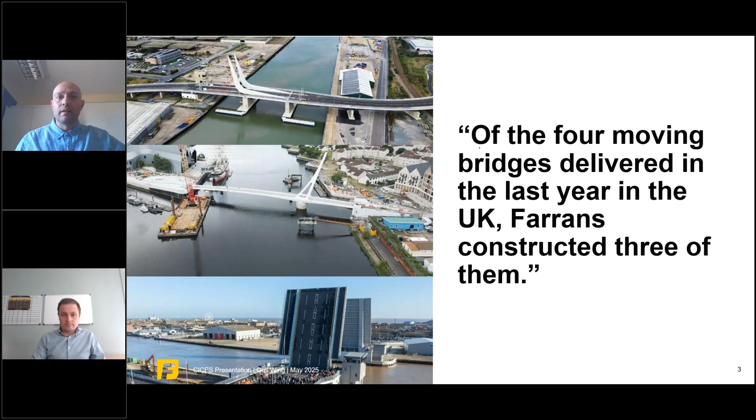The agenda for this presentation will cover the following: an introduction to the scheme, including high-level information about the purpose, benefits and major elements. We will discuss key construction activities, highlighting significant elements and the wide range of construction techniques employed in their delivery, and the challenges — this was a technically demanding project which presented many challenges to our team.

Today we'll focus on the NAV1 install, the marine cofferdam construction including Pier 4 specifically, and the bascule bridge span installation. To wrap up there will be a question and answer session, so if you have any questions you'd like us to answer, please type them into the chat box and we'll try and answer as many as we can at the end.

So let's get straight into the main subject of this presentation, the construction and associated challenges faced in the delivery of this landmark project.

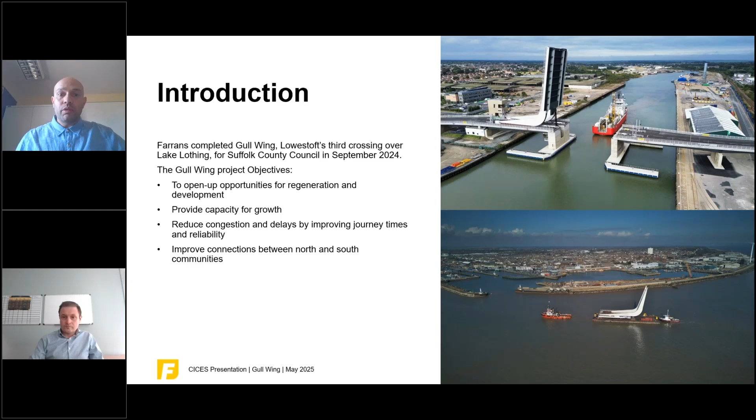The Gull Wing Bridge opened to the public on the 7th of September 2024 and is the third crossing of Lake Lothing. Its main objectives are to encourage opportunities for regeneration and development, to provide additional capacity to support growth, reduce congestion in the town, reduce journey times and improve reliability of those journey times. This will improve the connection between the communities north and south of Lake Lothing. This is a project that the locals have been campaigning for over a generation, and it has finally been delivered and welcomed by the local residents.

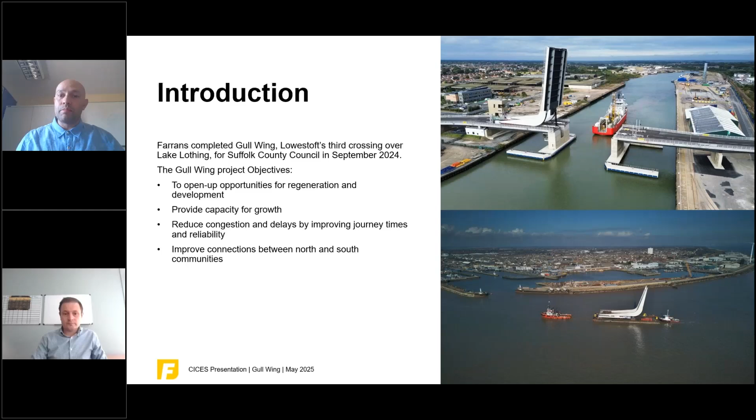The Gull Wing Bridge is located in Lowestoft, a coastal town in Suffolk and the most easterly point of the UK. The new bridge provides an additional crossing of Lake Lothing, which forms the inner harbour of the port of Lowestoft, connecting the Waveney River and the Broads National Park to the North Sea, effectively cutting the town in half.

Until now, there's only been two crossing points: the A47 bascule bridge on the east, located at the Sea Harbour, and the Mutford Lift Bridge on the west at the mouth of Oulton Broad. To the west of the town are the rail connections in red, which also affect traffic flows as there are two level crossings on the main traffic routes.

So as you can imagine, with marine traffic from the operational port and recreational vessels entering and exiting the Broads National Park, the regular rail services interfering with traffic routes, the journey time for local traffic are frequently impacted. This new crossing provides more reliable journey times as it bridges the rail line and provides 12 metres of clearance at high tide, which is nearly 4 times that provided by the A47 bascule, thus significantly decreasing the number of bridge openings required per day, maximising the availability of the route to road traffic.

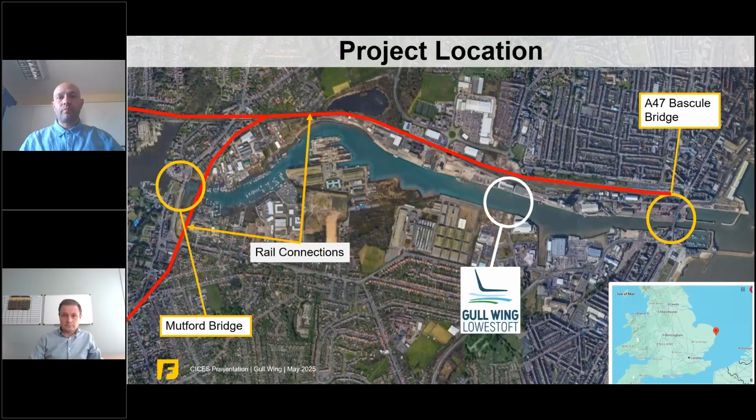The project is for the construction of an 8-span viaduct, including the rolling bascule, with roundabouts to the north and south. It provides a single carriageway road with cycle and pedestrian facilities on both sides of the carriageway.

This leads to the south approach embankment, a reinforced earth embankment connected to the south abutment. Then we have the south approach viaduct, or SAV as we call it. The SAV has 4 spans supported on the south abutment and 4 piers, the last of which, Pier 4, is located within Lake Lothing. The final span onto Pier 4 is responsible for taking the majority of the load of the bascule bridge, which rolls back onto this span when opening.

The control tower is located adjacent to the south approach viaduct. This is a 7-storey building with adjacent plant rooms situated beneath the bridge deck. Between them, we house the bridge operator, the hydraulic pumps and all the equipment required to operate the bridge, as well as a backup generator.

The bascule span, supported between Piers 4 and 5, located within Lake Lothing, is a 39.5 metre span. It is a single leaf rolling bascule and the largest of its type, powered by hydraulic cylinders.

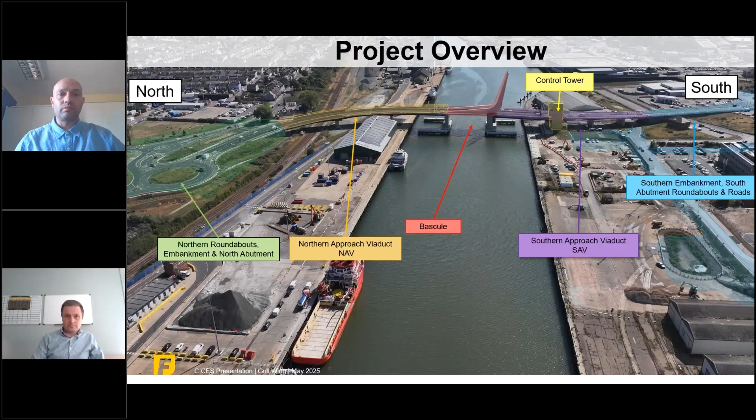To give an idea of the scale of the project, here are some of the high-level figures. There's more than 2,250 tonnes of structural steelwork fabricated and installed between the approach viaduct and bascule spans, of which the bascule span contains circa 650 tonnes, and that doesn't include the 400 tonnes of counterweight concrete. The bascule raises in 116 seconds and lowers in 106 seconds.

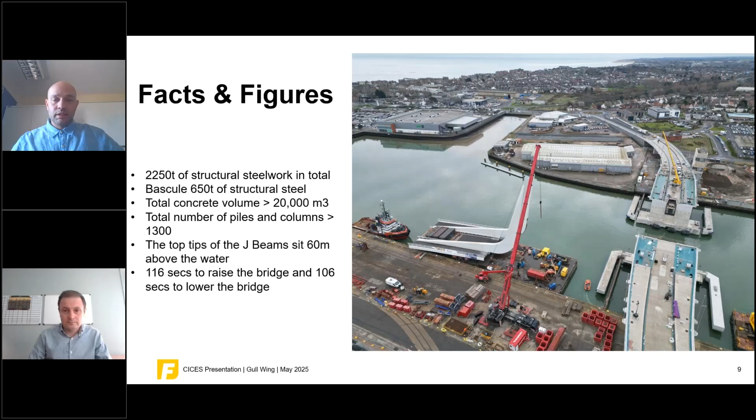Thanks, Tristram. I'm going to give you an overview of some of the key construction activities we undertook to construct the bridge.

The first is piling and ground improvement. Piling was amongst one of the first operations to commence, with several different types of piles and methods required.

On the left photo, you can see the auger push piles for the eastern protection dolphins to the piers. These were steel piles which were screwed into the lake bed using an auger push technique due to the proximity of a UK Power Networks tunnel, which required us to minimise vibration. To install the piles, we required a static platform in the form of a jack-up barge, which you can also see in the image, the piling rig sitting on it.

Hydraulic drop and vibration hammers were used to install the other steel tubes and sheet piles for the marine pier cofferdams on the western dolphins, with a total of 184 piles in total. The image in the centre shows the installation of the cofferdam for Pier 4.

Rotary bored piles were also required for the marine pier foundations. These piles were installed through the steel combi tubes, and are up to 65 metres in length.

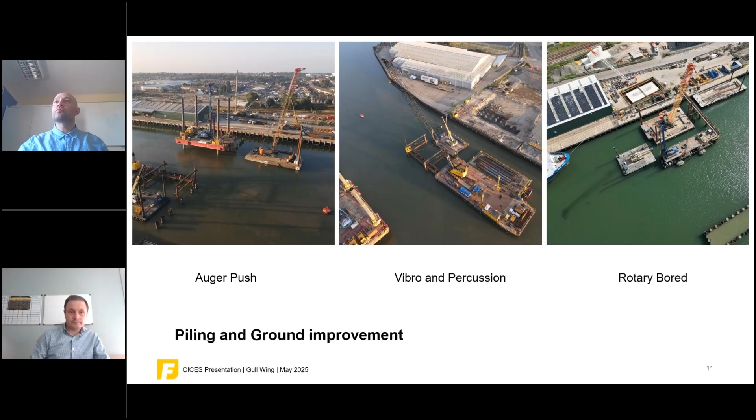Landside, we required approximately 170 number continuous flight auger piles for the land-based piers and structures. These were 1,200mm diameter and ranged between 25 and 30 metres in depth. The image to the left shows installation of piles to the control tower and the plant room. The central image shows the piles installed for Pier 6 being cropped down to size, and you can get a real sense of the scale here with the mini-digger in the foreground.

And then the right-hand photo shows the deep soil mixing. There were some 1,200 deep soil mix columns which were installed below the northern approach embankment as a ground improvement technique, and these were then topped with a mass mixed load transfer platform. A deep soil mix column adjacent to the north abutment can be seen in this photo being installed.

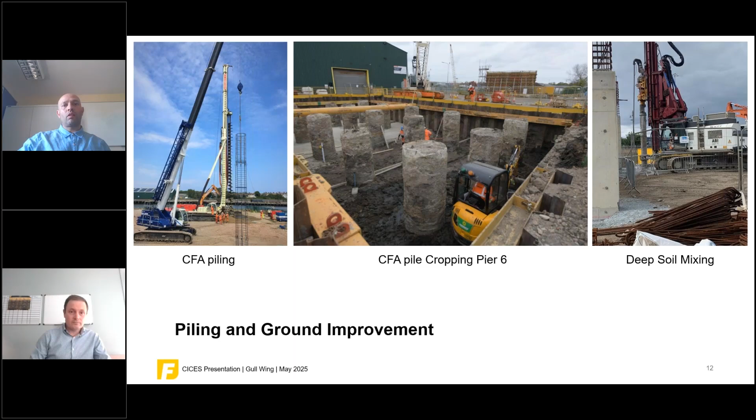There were numerous and significant concrete structures required across the project, some of which can be seen in the photos on screen. The image on the left shows Pier 3, the plant room immediately behind it, and the control tower to the right-hand side. Pier 2, Pier 1 on the south abutment, and the south approach in the background behind.

The image in the centre shows Pier 4 completed with the south approach steelwork in position and the placement of the permanent formwork ongoing. And the image on the right shows Pier 5 in the foreground supporting span nav 3. You can then see nav 2, and finally you can see span nav 1, which crosses the railway with its deck and its parapets already completed.

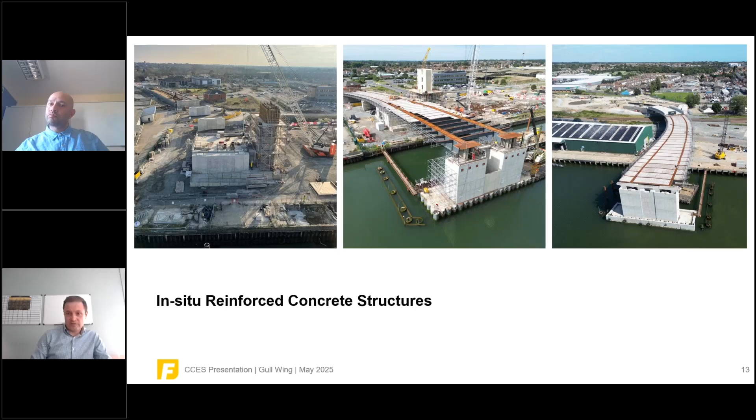That we will come to in a moment. And beyond that, you can see the northern approach embankment.

Temporary works were critical and a very significant element of the construction works that we carried out. All of the viaduct sections and the bascule span were manufactured off-site in Belgium by our supply chain partner, Victor Buyck Steel Construction. The viaduct sections were delivered in 3 stages.

Span nav 1 was delivered first, which was installed over the railway during a planned possession. Spans nav 2 and 3 were next to be installed, closely followed by the 4 southern approach viaduct spans. These were all transported to site by barge, installed by crane.

Various sizes of cranes were used, the largest being the CC 8800, which has a 1,750 tonne capacity, and was used to install the southern approach spans. This crane is one of the top 10 largest crawler cranes in the world.

The bascule was then delivered last, and this was installed directly from a barge without the use of craneage, and further detail will be provided later on.

The image here on the left shows span SAV 3 being installed with the CC 8800. The image in the centre shows one of the two cylinders being installed into the cylinder pit, safe at Pier 4. The cylinders are substantial items, weighing approximately 60 tons each, and they have to be lifted, orientated correctly, and secured within the cylinder pit prior to arrival of the bascule.

And the image on the right shows the bascule span itself being moved into position by barge. It's worth noting that we had a 3-week channel closure to get the bascule into place and operational, as the channel had to be reopened to port traffic by the end of that 3-week period.

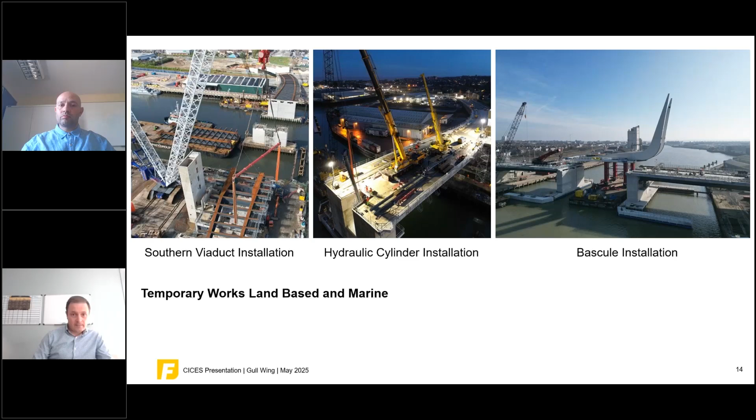Thanks, Ross. As Ross talks through these quickly, it sounds straightforward. It wasn't. Each of these elements presented their own challenges.

There were physical constraints, both on and off site, that had to be dealt with. Each demanded detailed coordination with numerous suppliers and stakeholders located across the UK, Europe and beyond. Constant review was required across the site of progress, phasing and interfaces to ensure coordination of site activities, logistics for moving the sizable elements of the bridge across from Europe, and preparation of the temporary works required for the heavy lift plant needed for installation. Next, I'll talk through a number of these challenges, how they were managed and overcome.

The Gull Wing Bridge project had many interesting and varied challenges throughout. Today I'm going to focus on two of the most challenging parts of the project. The first is the North Approach Viaduct Span 1, or NAV1 as it was more commonly referred to. NAV1 is a curved viaduct span constructed on CFA piled reinforced concrete foundations, the north abutment and Pier 7.

The deck is designed as a composite structure made up of a structural steel ladder consisting of two longitudinal main girders with transverse cross girders, combined with a reinforced concrete deck. Some key statistics: the span is founded on 31, 1.2 metre diameter continuous flight auger piles, 25 to 30 metres deep. 2,100 cube of concrete was poured in the foundations between the piles, pier and abutment. There's a 55 metre span between the north abutment and Pier 7. There were 290 tonnes of structural steel used in the span, and 460 cube of reinforced concrete was used between the deck and the parapets.

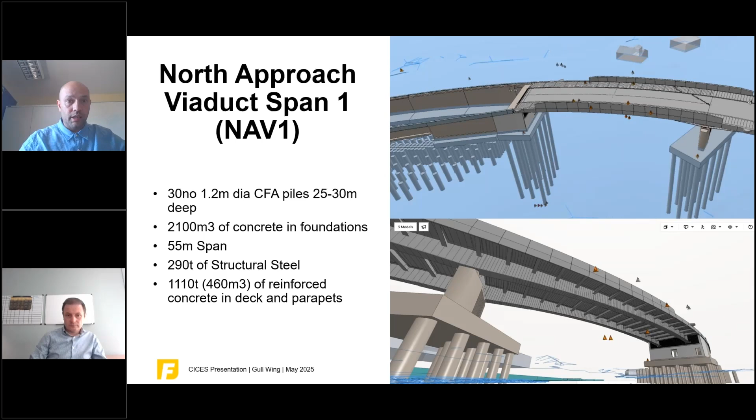The key constraints in this area were the East Suffolk Railway, which included up and down lines plus working sidings. As part of the client's agreement with Network Rail, a single 52-hour weekend possession of the railway had been agreed to allow for the installation of this bridge span. Early programme committal was required as possessions of this nature are booked over a year in advance. All on-track and adjacent line working needed to be approved by Network Rail and in accordance with their engineering management for project and engineering and architectural approval for building and civil engineering work standards.

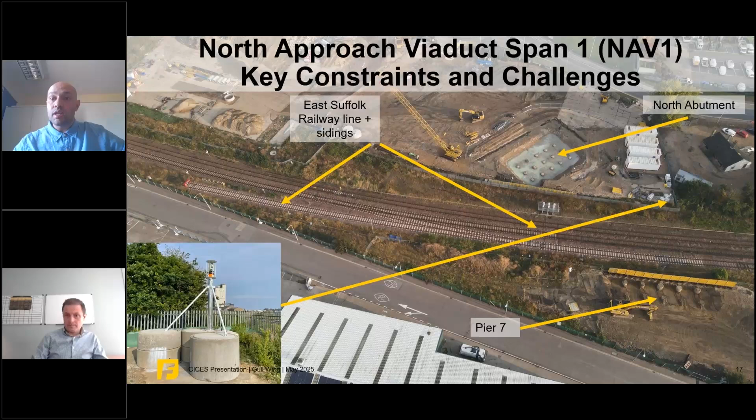All design submissions had to be submitted using the Network Rail Forms 1 to 3, and all works had to have an accompanying Network Rail Work Package Plan style method statement. As part of the Network Rail approvals, a 24-hour track monitoring system was required to monitor the track for any potential settlement. We set up an automatic total station and 300 track-mounted measurement prisms for this purpose.

Commercial Road is the single and only road servicing the Port of Lowestoft. It is owned and operated by Associated British Ports. Commercial Road had to remain open 24 hours a day so as not to impact on ABP's port operations.

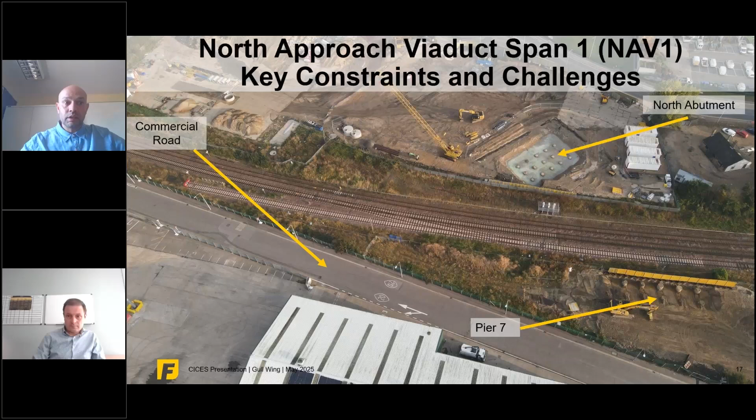The key constraints in this area were: NAV1 has been designed so that the deck could be poured offline to minimise the amount of interface with the live railway. Farrans elected to use our specialist structural steel contractor, Victor Buyck Steel Construction, to fabricate all the major bridge spans off-site in Belgium.

The completed spans could then be transported to Lowestoft by barge. The structural steel would arrive by barge and then be offloaded using self-propelled modular transporters, SPMTs, and moved to a temporary storage area between the railway and Commercial Road. Once supported on 12 temporary trestles, the concrete deck and the high containment concrete parapets could be constructed.

The bridge would then be jacked up 6.5 metres in the air above Pier 7 and north abutment bearing shelves, and transported into position using a larger combination of SPMTs than was required for the bare steel offload, as the bridge would now weigh over 1,400 tonnes.

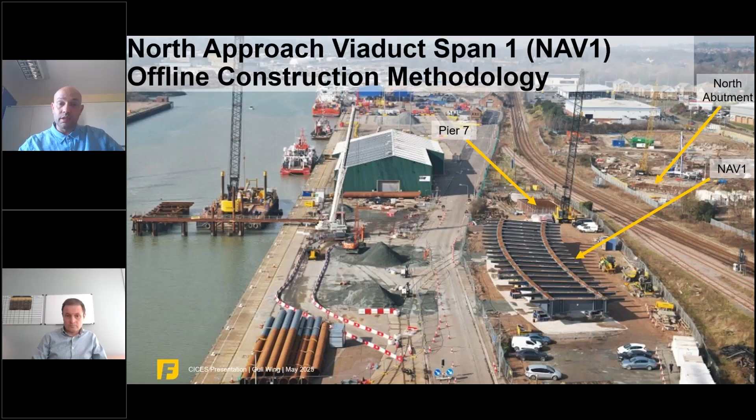On the Gull Wing project, which was of significant size and complexity, there were many hundreds of temporary works designs required. For NAV1, some of the key designs required included piling and crane working platforms, a well point dewatering system to facilitate the pile cap excavations due to the high groundwater table, and an associated geotechnical dewatering analysis to assess impact on the railway track support zone.

Excavation support was required for the north abutment and Pier 7 pile cap construction. The support design at Pier 7 required a sheet piled wall adjacent to the railway boundary, which you can make out in the central photograph. A temporary raft foundation support slab for the offline deck construction area was required to ensure no differential settlement occurred during the incremental application of construction loads, as this would be locked into the deck once cast.

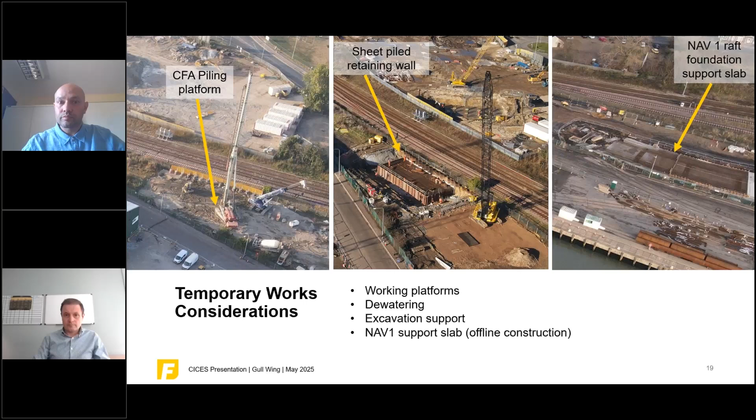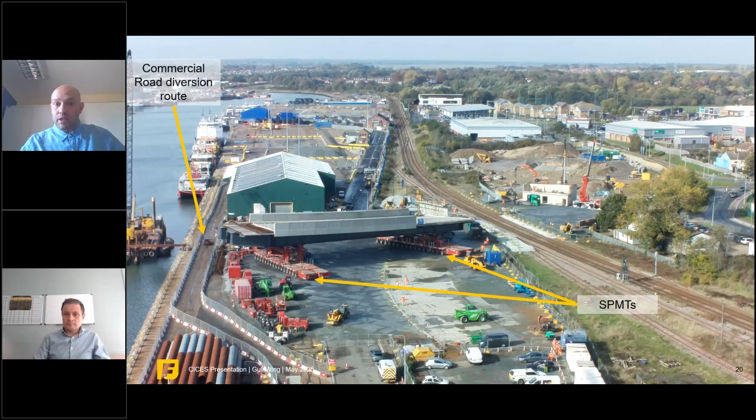Working platforms and track protection designs were required for operating the SPMTs. For the main installation, two rows of SPMTs with 16 axles on each row were required at each end of the NAV1 span to manoeuvre the 1,400-tonne bridge into its final position. You can also see to the left of the photo the temporary diversion of Commercial Road, which was required to create the space needed to pick up and rotate the bridge, ready in advance of the railway possession in the final installation phase.

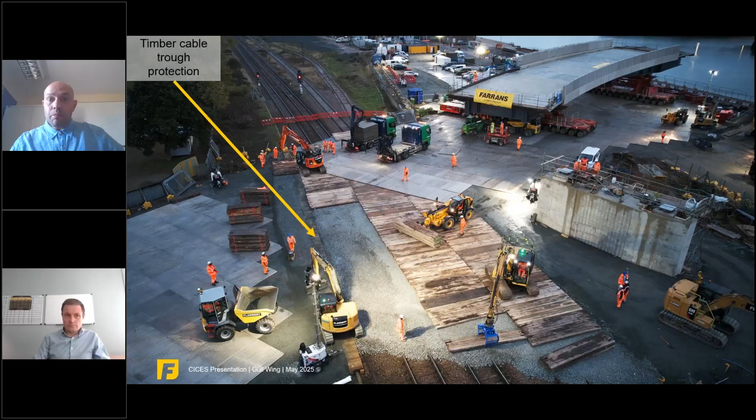This slide shows the installation of the temporary track protection system, which involved removal of some key items of the railway signalling system, timber protection around the railway points and trackside cable troughs, covering the railway tracks with ballast to create a smooth and level working platform, creating a load spreading platform with timber spreader mats, and creating a smooth running surface for the SPMTs with an aluminium trackway system.

The design approval for this protection system took many months of optioneering, discussion and risk analysis with Network Rail, as it's not a commonly used method of track protection. It was chosen as it provided the greatest load spreading properties and involved a relatively quick and simple installation and removal methodology to allow us to complete the works within the allotted possession time compared to some of the other options considered.

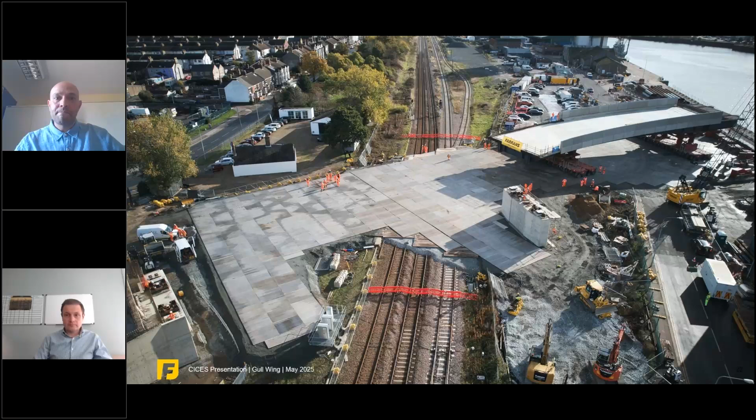This slide shows the completed track protection system, ready to commence the final installation phase with the SPMTs. This slide shows NAV1 on the move.

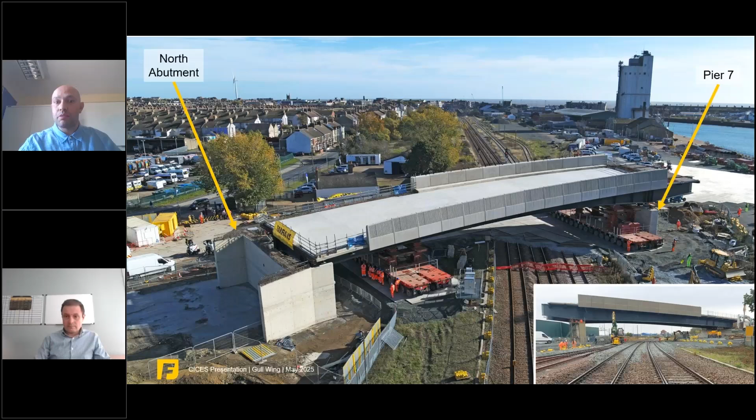This slide shows NAV1 in place between the north abutment and Pier 7, still on the SPMTs while the load was being transferred to the bearings and the temporary restraints which held the bridge in a safe position while the bearings were grouted and cured to fix the bridge in position. The inset at the bottom right of the photograph is a picture taken at the end of the possession with the track protection removed, ready to reopen the railway line to trains.

The next construction challenge I want to talk about today is the construction of the marine cofferdams for Piers 4 and 5. The design for the Pier 4 and 5 cofferdams was for a steel piled combi wall arrangement, with Pier 4 wider to accommodate the additional space required to contain the hydraulic cylinder pit. The cofferdams were designed to be constructed using a combination of 1200 mm diameter steel tubes and AZ27-800 sheets, all 16.5 metres long with a toe level of -14 metres AOD.

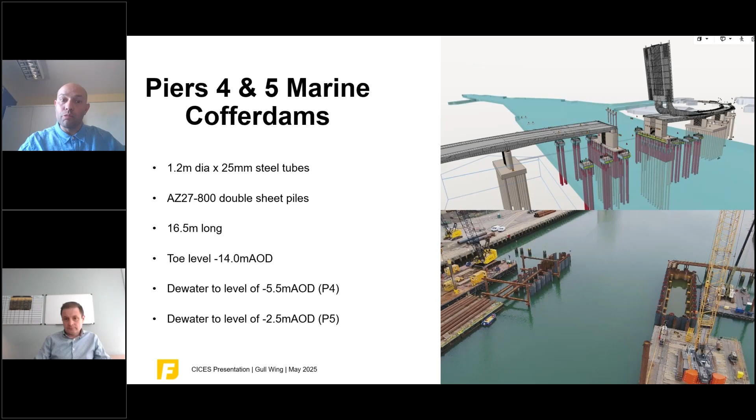The design made provisions for the steel cofferdam with the inclusion of a reinforced concrete plug in the base, which had to be constructed in the wet, to function as a cofferdam to facilitate dewatering to a level of -5.5 metres AOD in Pier 4 and -2.5 metres AOD in Pier 5, allowing construction of the pile caps and pier foundations below the waterline, and then to remain as the permanent footprint to contain and protect the pier foundations.

Some of the key constraints and considerations associated with the marine piling operation were: Piers 4 and 5 are located in the marine environment of Lake Lothing, approximately 30 metres from the south and north quays respectively. A UK Power Networks service tunnel, 2 metres in diameter, carrying critical power and communications cabling, was located 5 metres from the line of the eastern dolphin piles and 7.5 metres below the dredged channel bed of Lake Lothing.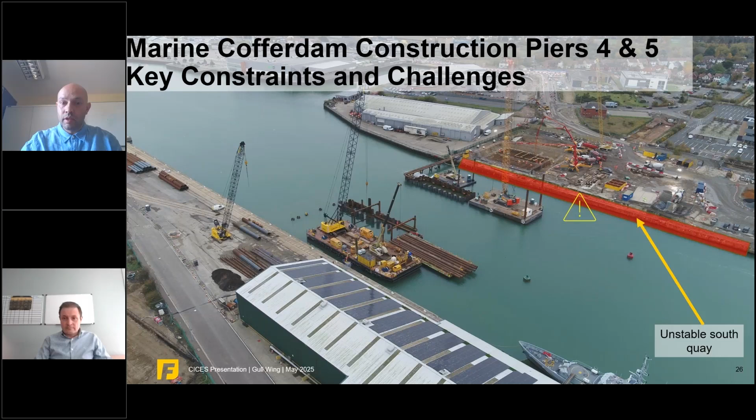A 32-metre wide clear navigation channel had to be maintained 24/7 to allow the Port of Lowestoft operations to continue. This was a condition in the development consent order issued by the UK government for the project. The South Quay was unstable - an unmaintained quay wall with corroded piles and large voids behind them, caused by the washout of backfill material.

Farrans constructed the marine cofferdams using conventional marine piling techniques. The steel piles were installed by utilising a temporary piling frame, Farrans' in-house heavy lift crane barge, and crane-suspended vibro and hydraulic drop piling hammers. A piling sequence had to be planned to ensure that at each stage the placement of marine plant allowed for the 32-metre clear navigation channel to be maintained to allow unrestricted commercial port operations to continue.

No spud legs from any of the barges could be located within 10 metres of the UKPN tunnel on the bed of Lake Lothing. Vibration and settlement monitoring of the tunnel was required throughout the marine construction phase of the project to ensure the works were not adversely affecting the tunnel. Sufficient space had to be maintained from the South Quay wall, which had a high risk of collapse. This prevented dredging along the front of the quay, which would have made marine plant positioning easier, but as it was, there was a shallow lake bed close to the South Quay, restricting the available plant that could work in that zone.

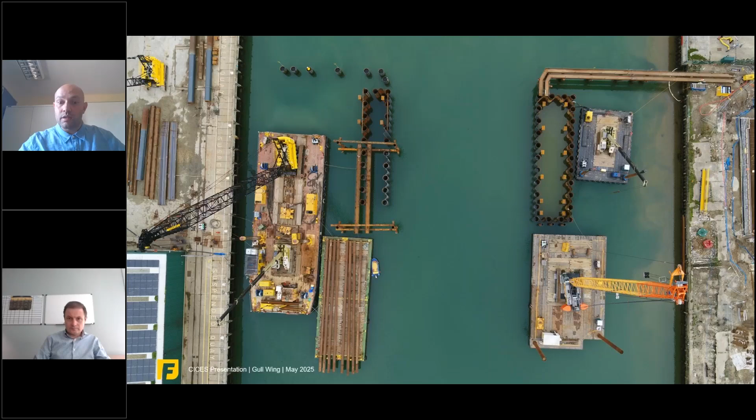In this photograph, you can see on the left the Farrans crane barge working on the steel piling for Pier 5, with a piling gate installed for tube installation. Pier 4 on the right has already been completed with all steel piles installed, along with the temporary access walkways which we installed, utilising the permanent dolphins protection piles as supports, ready for the next stage of construction, the rotary bored piling.

The ground investigation borehole showed the ground conditions were made up of a layer of alluvium overlaying a 10 to 15 metre thick layer of Happisburgh clay, with the crag group granular sandy material found below this to depths of about 65 metres, where the deepest borehole ended. The ground conditions were particularly challenging, with blowing sand picked up during the ground investigation phase.

The piers were designed to be supported on 42 rotary bored piles, 1.08 metres in diameter, ranging between 24.5 and 62.5 metres of working length, which meant piles of up to 65 metres below platform level. The longer piles provided a greater degree of skin friction to support the extremely high loads exerted from the static and cyclical movement of the bascule bridge span above.

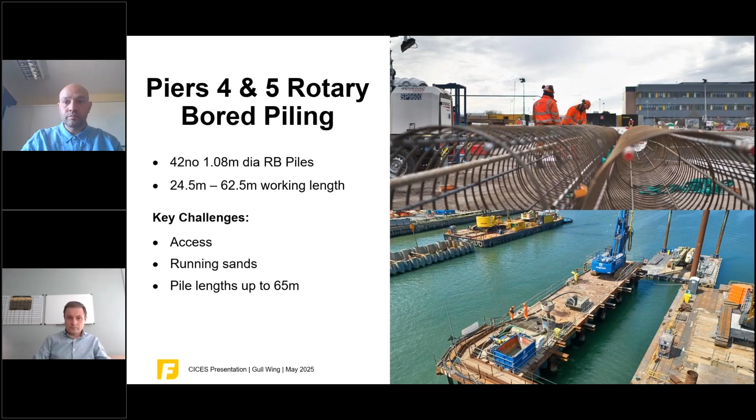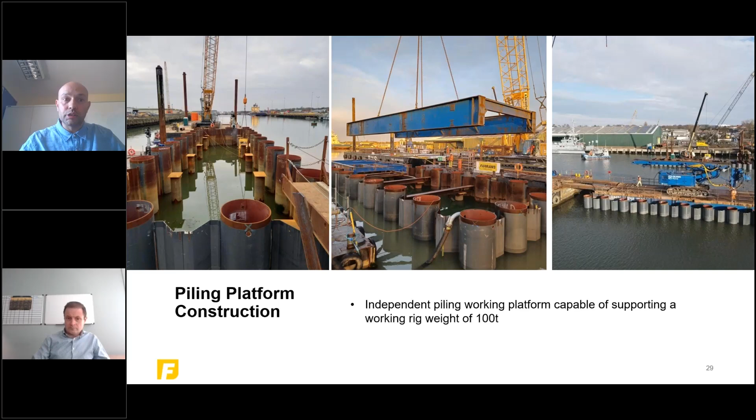Due to the length of the rotary bored piles combined with the ground conditions, a polymer support fluid was required to maintain the bore while the piles were constructed. Quinn Piling were contracted to carry out the rotary bored piling under polymer due to their experience and expertise with working in similar environments before. These piles, however, were exceptional due to the site-specific conditions and the required pile lengths.

You can see in the photographs here the piling rig working on the Pier 4 cofferdam, boring piles down through the steel tubes of the cofferdam. On the quay, the blue polymer tanks and testing lab. Maintaining the correct polymer consistency and head levels was critical to maintaining the bore and preventing build-up of filter cake around the bore's perimeter, which could impact on the skin friction and ultimate capacity of the piles. This required a 24-hour polymer testing and maintenance operation.

You can also see the compensation tank on the platform, which was connected to the pile, and used to maintain the required head of polymer to keep the bore stable. The pile arisings were discharged into boat skips and lifted to shore using the white 250-ton crawler crane with luffing jib, while rebar cages, concrete tremies, etc. were handled by the 130-ton and 40-ton crane barges.

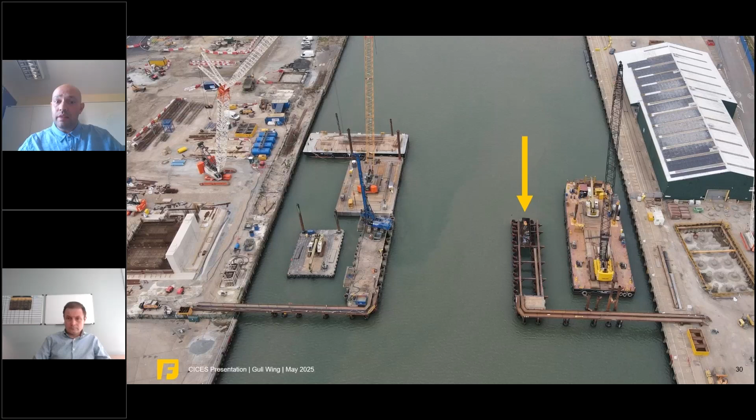You can also see Pier 5, which has the platform frame installed and is waiting on the deck matting, and the Pier 6 pile cap excavation, which also required a cofferdam due to the proximity of the quay and the adjacent shed, as well as the plant room under construction behind Pier 3.

I shall now hand you over to Ross, who will take you through the construction of Pier 4 and the bascule bridge.

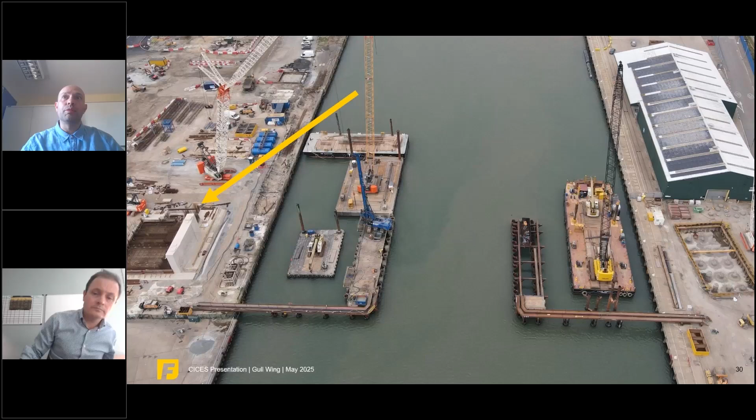Thanks, Tristram. Well, you've just heard about construction of the cofferdams and the associated piling works, and I'm now going to pick up on the construction of Pier 4, which the cofferdam facilitated, and installation of the bascule span, which is located on top of Pier 4.

Once the rotary bored piles had been installed and the temporary works platform supporting the piling rig demobilised, excess material from inside the cofferdam was removed and a concrete plug poured in the wet. This allowed the cofferdam to be pumped dry whilst avoiding the risk of flotation. Construction could then begin on the reinforced concrete pier, which supports the bascule and houses the hydraulic cylinders which open the bridge.

This photo shows the works to cut down and remove the inner perimeter of the steel combi wall tubes, which subsequently allowed the rotary bored piles to be broken down and the exposed reinforcement tied into the base slab of the pier. A temporary waling system can be seen, which held the opposing cofferdam walls apart. This wasn't required for stability, as would be normal for a cofferdam, but it was necessary to maintain the line of the cofferdam to ensure that the preceding concrete works were on the correct line and plan.

The deflection of the severed tubes had been calculated at 100 millimetres, which would have resulted in the span being too short, had it not been prevented.

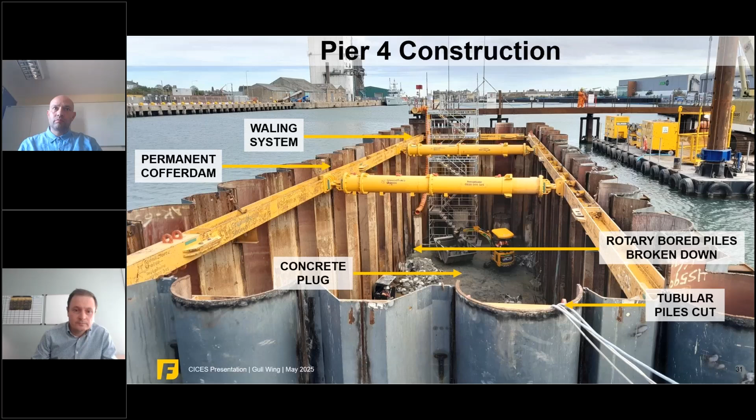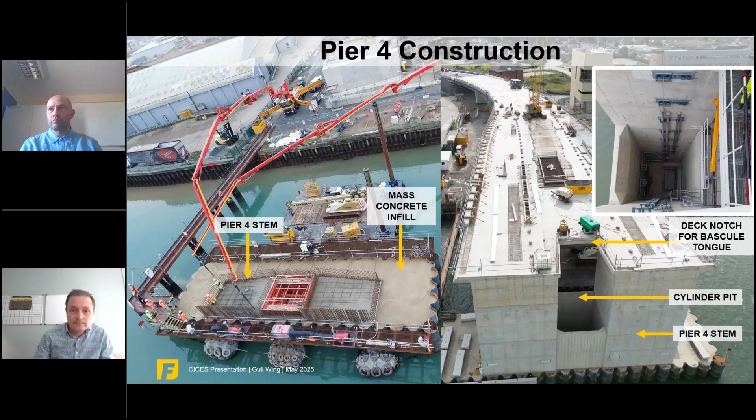As we previously noted, all of the steelwork was fabricated in two Victor Buyck factories in Ghent, Belgium. The bascule steelwork would have been too tall to allow the J-beams to be welded in place in Belgium due to the restricted height clearance below the bridges in the Ghent-Terneuzen Canal between Belgium and the Netherlands, for the route onward to the North Sea and eventually Lowestoft.

The solution was to transport the bascule, deck, and the J-beams unconnected by barge to a Mammoet facility in Westdorpe in the Netherlands, which is downstream of the bridge restrictions. The bascule and the J-beams were offloaded, and the bascule deck was then supported to allow unhindered access to undertake connections of the J-beams.

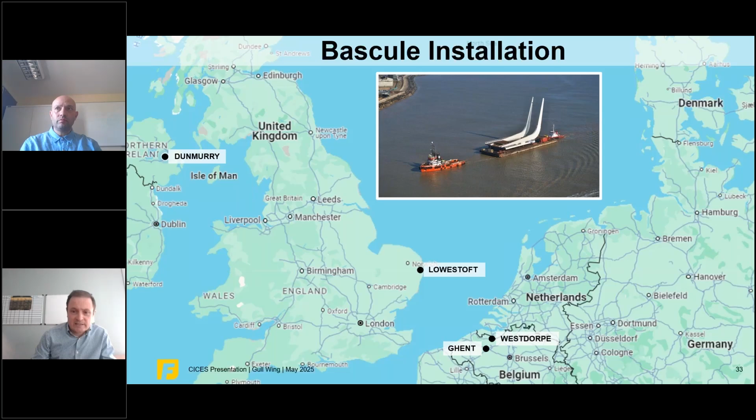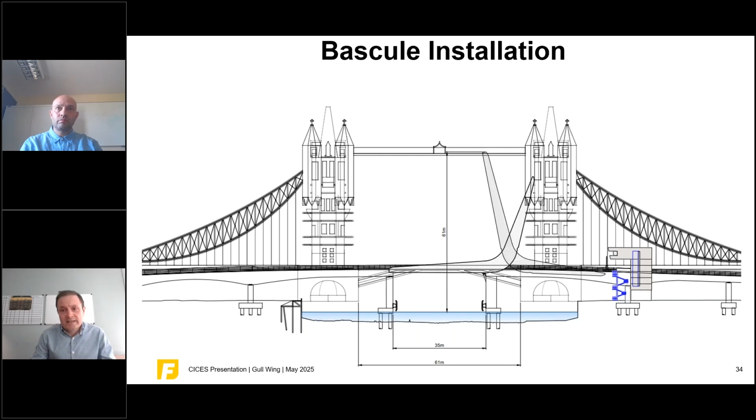This image provides an idea of the scale of the Gull Wing Bridge against another famous bascule bridge, which is Tower Bridge in London. In the open position, the nose end tips of the J-beams are 61 metres above water level.

This image shows the bascule in Westdorpe in the Netherlands. In the background, you can see the blue temporary works frame, which was used to support the two J-beams in position during fabrication works. The eastern J-beam has already been located and the connection prepared ready for welding.

Whilst the bascule was in Westdorpe, we undertook some additional works prior to delivery to Lowestoft. This included completion of the carriageway deck, the surfacing to the carriageway deck and footways, as well as installation of the parapets. But the main element of works undertaken were to machine the J-beam flanges to allow the curved tracks to be installed.

The J-beam lower flanges had been oversized by Victor Buyck by 40 millimeters. That's to say they were 140 millimeters thick as opposed to 100. This was to facilitate machining of the two flanges to create a perfect 10-meter rolling radius to which the curved track would be bolted.

The photo here shows the pivot point on the temporary track which has been welded to the J-beam web, and the cutter swing arm which supports the milling machine can then be seen in the inset photograph, along with the machined J-beam flange which you can see at the top of the inset photograph.

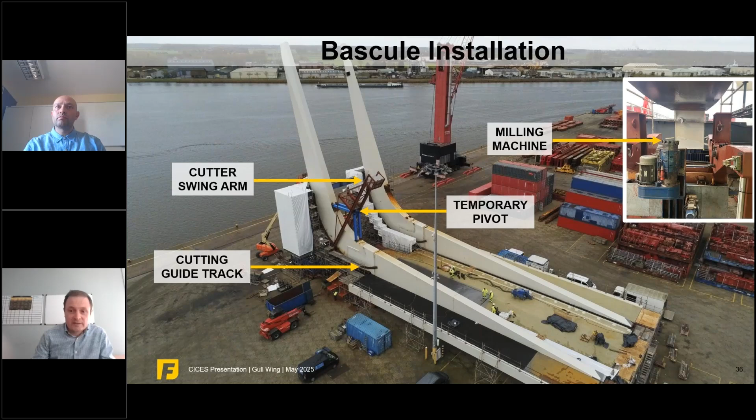With the two flanges machined, holes were then drilled and tapped for the curved racks. They can be bolted into position once the paintwork remedials have been completed.

The image on screen here is from a 3D survey completed by Oilgear and their specialist supply chain to agree the center rotation, to ensure that once machined, the minimum flange thickness of 100 millimeters remained, and the two flanges are machined in the same plane at a 10-meter rolling radius.

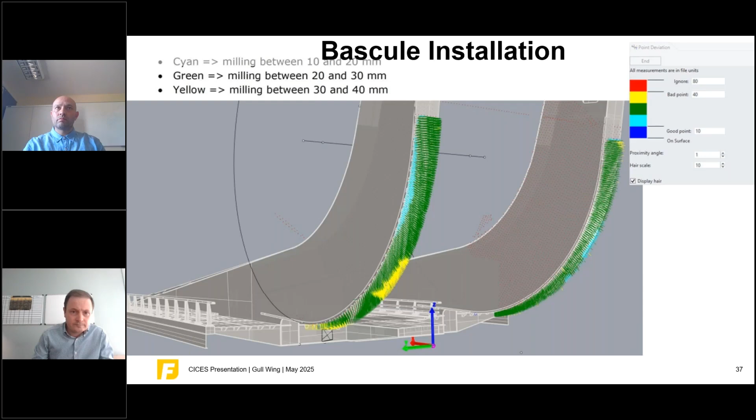The bascule was then transported to Lowestoft, and as you can see in the main photo, it shows the bascule on a barge passing through the existing bascule bridge in the A47 at the mouth of Lowestoft Harbour.

We then had a week of activity to prepare for installation between Piers 4 and 5. This included removing the sea fastenings, swapping out some temporary support sections which had been installed in Westdorpe in lieu of the curved track, which allowed the bridge to be supported on the barge without damage.

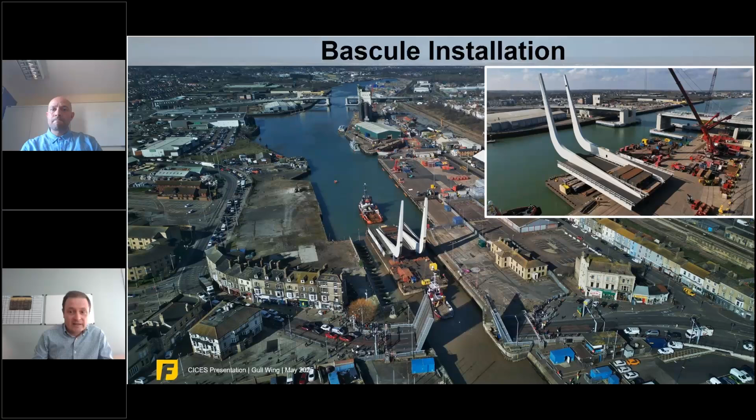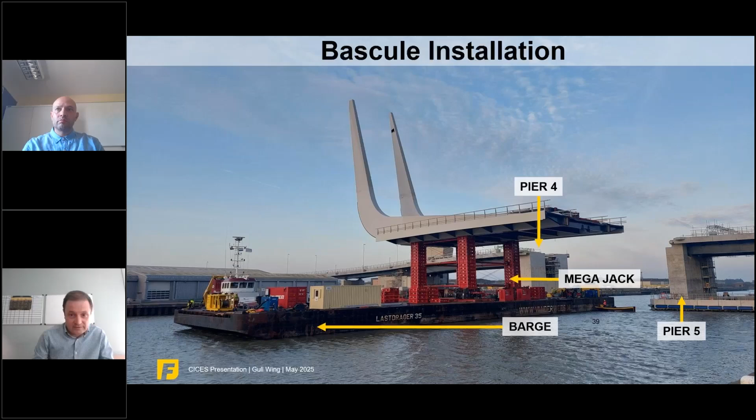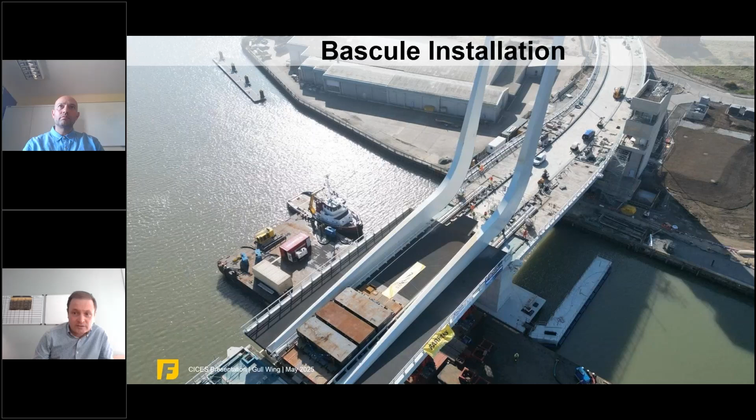The barge was manoeuvred into position on a Saturday morning in early March 2024. It was then jacked down into position. The cylinders were extended upwards, and thanks to some clever temporary works attached to the clevis plates holding the correct angle, the clevis plates were offered up to the lift box on the underside of the bascule, and the bolts were able to be secured into the lift box first time.

This photo shows a view from the underside. You can see the two cylinders, you can see the clevis plate, temporary works, and then you can see the lift box and a number of the bolts being put into place.

It should be obvious that such smooth installation with no clashes was not left to chance. For over a year previous, we had held weekly tolerance meetings between ourselves, Victor Buyck, Oilgear and Demir, and the permanent works designer. We tracked all interfaces between the elements. We discussed the impact each element had on the next, and which party was responsible for that interface. That party was then tasked with bringing more information in terms of surveys and further designs to allow the interfaces to be checked to ensure that they were free of clashes.

One good example of this was between the clevis plate shown here, on the top of the cylinder, and the lift box to which it is bolted on the underside of the bascule.

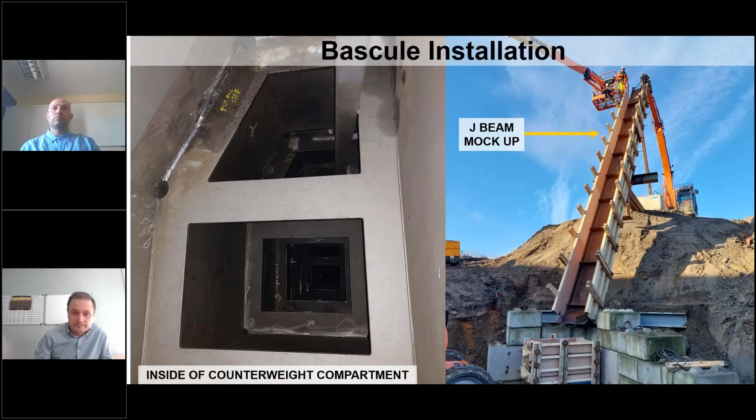The design intent was to add just enough counterweight such that the nose end reaction at pier 5 was reduced to 140 kilonewtons per side, with a tolerance of plus or minus 3 kilonewtons.

So in the grand scheme of things, the overall bridge weighs 760 tons or thereabouts. You have a tolerance of 600 kilos, plus or minus. And this was all to be done while maintaining a center of gravity of the bridge, plus or minus 50 millimeters from the design COG position. So to do this, we created a load schedule.

We recorded all the assumed and then the actual weights of the bridge and all its components as it became known to us, and we completed a series of rudimentary calculations to confirm the COG position and the nose end reaction at each stage as the permanent works were installed.

This was very useful and it allowed us to identify that the weight of the cylinder and its clevis plate, which had been bolted to the underside of the bridge prior to installing the counterweight, had not been considered in the figures for the overall weight. We needed to allow for these.

On the morning of the pour, we installed two large load cells at the nose end of pier 5 and commenced pouring the heavy concrete, alternating between J-beams to minimise the out of balance effect.

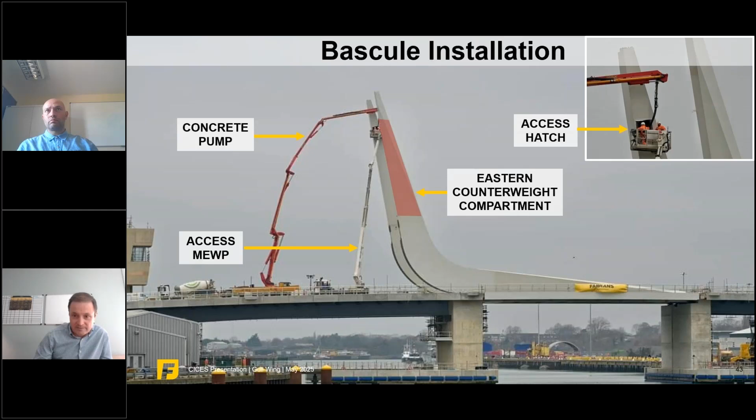So at 5 o'clock on the day of the pour, we went to pier 5 and swapped out the two load cells for smaller ones, and after some minor adjustments, we were able to confirm readings of 135 kilonewtons and 133.7 kilonewtons on the respective J-beam nose ends. The readings here are shown in tons, and they tallied with our design figures.

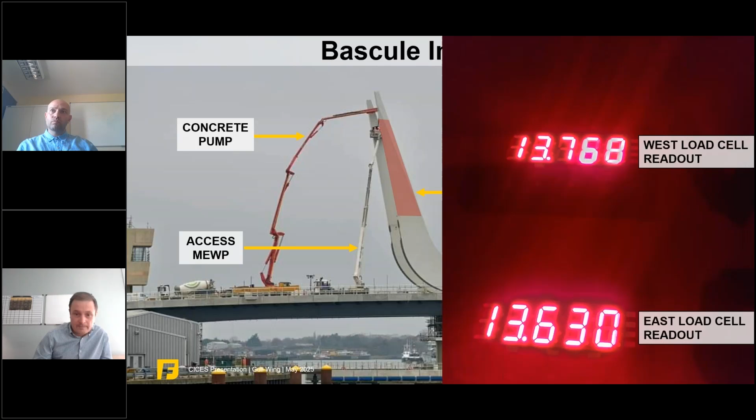So in summary, there were a great number of other technical challenges the team had to overcome, all of which made the Gull Wing a very interesting project to deliver. As an example, we haven't even delved into the MEICA design, which is a whole set of challenges of its own.